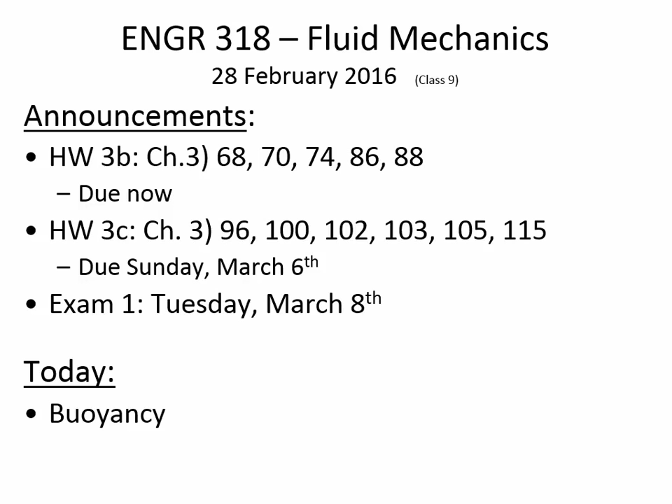Today we're talking about buoyancy, and I wanted to show you a picture of a gas station in West Virginia. This is where I'm from, back in the United States.

So what happened in this photo is that in West Virginia, the groundwater is very close to the surface. It's a very wet, rainy region, so there's a lot of water underground filling the pores in the soil. And when there's a lot of water in the soil, if the weight of a fuel tank like this is too low, it can push the fuel tank up and push the soil out of the way that's covering it, and it even has enough upward force to break the asphalt and concrete above it.

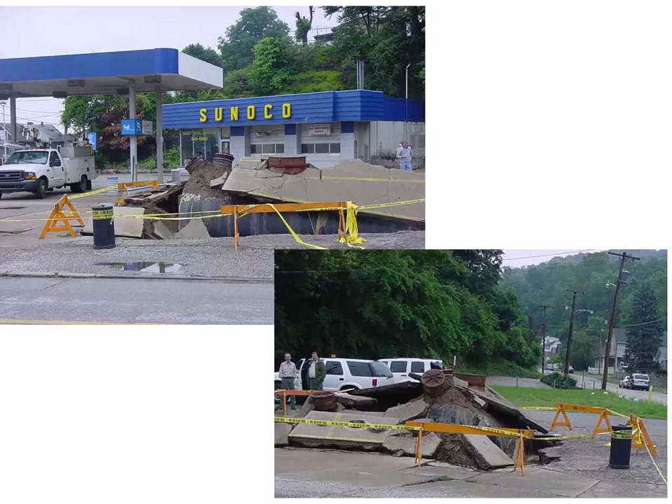Here's a few more pictures of it, and that's exactly what happened: the fuel tank was empty, and it was a very wet day where the water table came upwards and simply broke through the pavement.

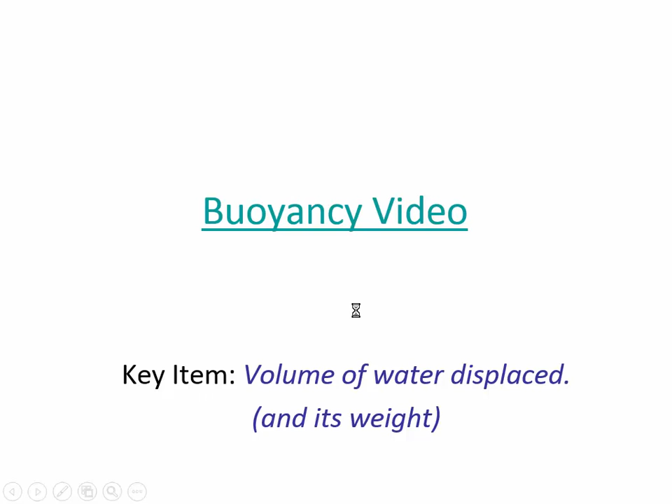This is an illustration of buoyancy that occurred even when we're talking about things other than pure liquids. Buoyancy is an important effect you have to consider in geotechnical engineering and in structural engineering. So that's what we're talking about today, buoyancy. The key item with buoyancy is the amount of water displaced by an object and the weight of the object itself. So let's watch a video that illustrates buoyancy and how it's used to control submarines.

The weight is equal to the buoyancy. Okay, the weight is equal to the buoyancy. Right, exactly, it's reached equilibrium at this point. That's why it's floating right now, because it came into equilibrium.

And so that's what we're going to be doing with buoyancy, considering force balances - looking at how the forces acting on the object compare to the weight of the object. Just to give you an idea of that simplification where we say the buoyant force is equal to the volume of water displaced, that's a simplification, but let's look from the beginning at the basics of what's happening to an object that's submerged underwater.

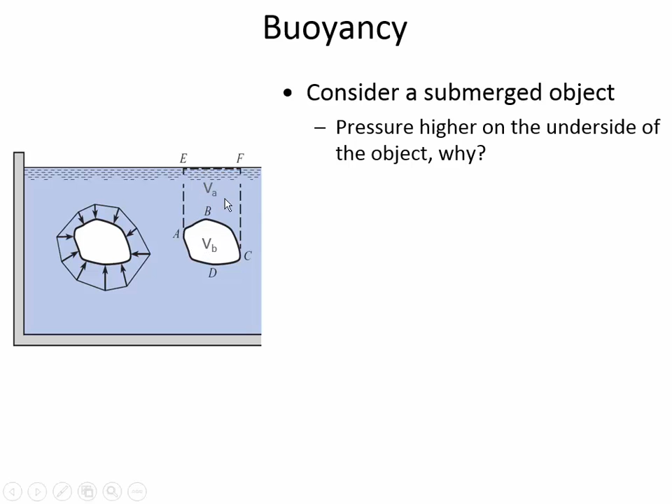All right, so what we have to do is consider the difference in the pressure between the top and the bottom. And so that's why the pressure is higher on the bottom, is because on the bottom the delta H is bigger. And if we consider the volumes involved, we can find the volume of water above the object and label that V sub A. V sub A is going to give us the weight of the water that's pushing downward. So here I've said force down is going to be the unit weight multiplied by the volume of water above the object. And the forces that are pushing up on the object are going to be equal to the volume of the body and the volume of liquid above the body. And so that's the net pressure that's acting upwards on that.

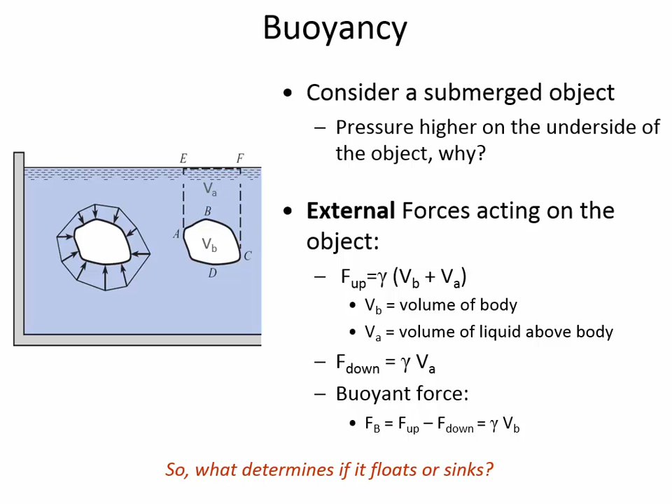And so if we consider the difference in the forces, the difference between the upward and downward forces, then F sub B, what we're calling the buoyant force, is just equal to the volume of the object itself multiplied by the unit weight. So what determines if it floats or sinks is when we compare the weight of the object to the buoyant forces of the object.

And so let's take a look at that with this cube. This is a plastic cube, and it has a volume of 1 by 1 by 1, so it's easy for us to calculate the volume on this one. We say that it has negligible weight - whatever plastic it's made out of is very, very light, and so the weight of this object is so low that we can neglect it. Let's say it's a hypothetical thing.

And it's submerged 3 meters below the surface, so the top surface is 3 meters below the water, and the bottom surface is 4 meters below the surface of the water. And so just as a check, so that we can compare the buoyant force approach to the difference in pressures and the difference of forces, go through these steps of: first, calculating the force on the bottom, the force on the top, the difference between the two in part C, and then in part D, just calculate the buoyant force based on the volume of this object.

And so when I say displaced, volume displaced, the interpretation of that is that this plastic cube that's in the water, it pushes the liquid that's surrounding it out of the way, and so it's displacing some water. That's what I mean by the volume displaced, is whatever this is taking up the space that normally would be occupied by the liquid. So let me bring up the lights, go through steps A through D, and see if we get the same force with either approach.

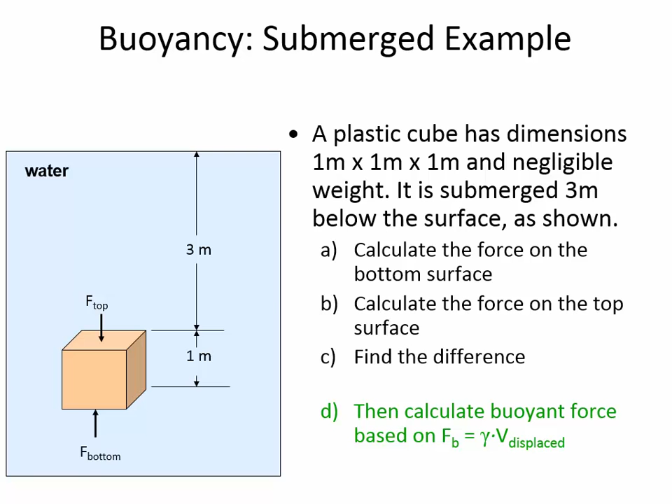All right, let's take a quick look at the solution here. So in step A, we're trying to find the force that's acting on the bottom, so it's pushing straight up from underneath the water. We can find the pressure at that depth by multiplying the depth of 4 meters by the unit weight, and then the area that the pressure is acting over - it's distributed over an area of 1 square meter. So that's how we can get the 39240 newtons, and it's pushing up.

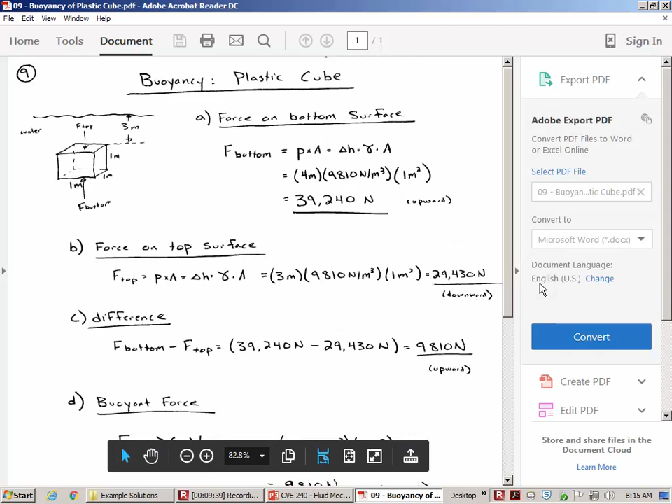And then the force from above that's pushing down is going to be equal to the depth of 3 meters by the unit weight of 9810, and then that's multiplied by 1 square meter. So the downward force is 29430 newtons, and so that's pushing down. So the net difference, if you've got one force pushing up and one force pushing down, and the force pushing up is larger, then we should have a positive difference. And the difference here is...

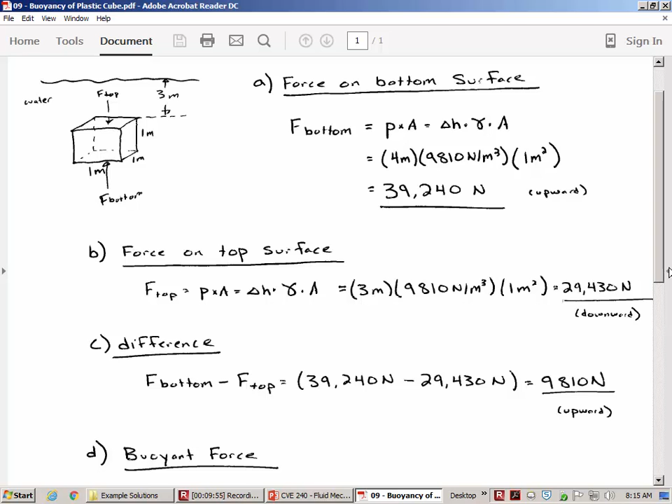9810 newtons upward. That means there's going to be a tendency for this to float up. Since we know the weight is negligible, it's not in equilibrium - this is going to be rising to the surface. Now if we look at the other method, just considering the buoyant force, we should get the same value for the upward force. If we just look at the volume of water that's displaced by this object, it's 1 cubic meter times the unit weight, so 9810 newtons upward.

Because the object is what's displacing water, we multiply it by the unit weight of the fluid being displaced, which is water, and the volume that's being displaced by the object. So we talk about the volume of the object itself.

It's going to go up. This one is going to go up. Yeah, it's not in equilibrium.

Now let's mention a couple of things. Right now we said it's going to be moving up, and the top is at a depth of 3 meters. What about when it moves up through the water a little bit? Let's see when it's at a depth of only 2 meters instead of 3. Are the buoyant forces going to change?

The difference will stay the same. Think about it: the pressures are going to be different. The pressure acting on the bottom will be lower, but the pressure acting on the top will also be lower. So as it rises through the fluid, although the pressures are changing, the net difference between them is the same. So the buoyant forces are not dependent on the depth.

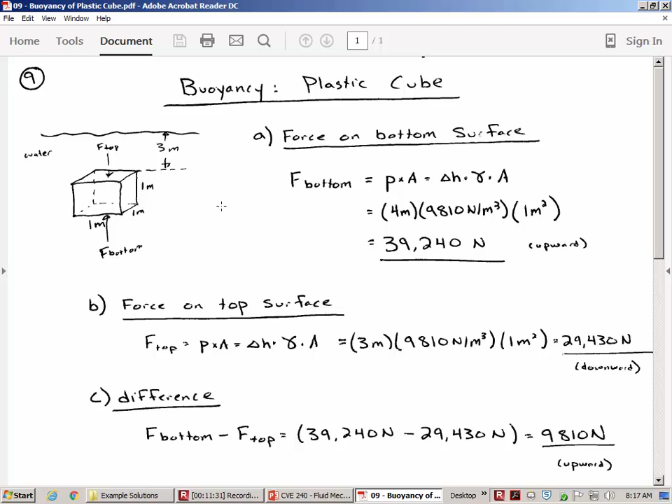We usually think that when you're really deep in the water, there's a ton of pressure pushing so hard on the object, and that's true. But the buoyant force—if we go to our simplified formula—nowhere in the buoyant force formula does it say what is the depth. It simply depends on the unit weight and the volume of water displaced.

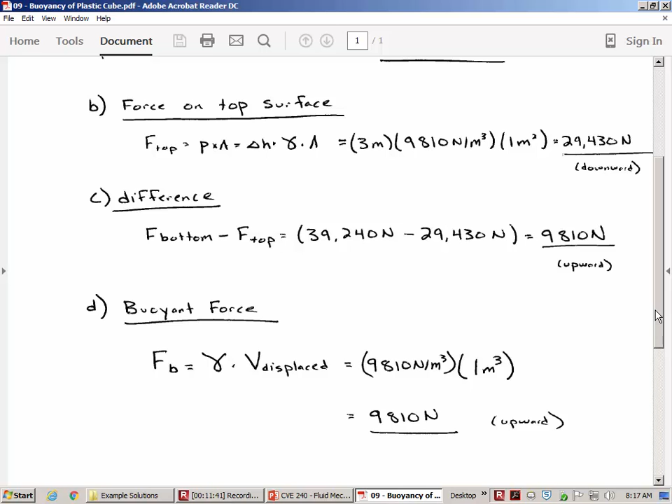Okay, are there any other questions before we move away from this example?

Now consider this object. It's only partly submerged. So sometimes the volume of the object and the volume of water that object displaces is not the same thing. Here you can see that the overall volume of the object would include A, B, C, D, just marking some of the key points of that object. But V sub D is the submerged volume—D stands for displaced, the amount of water that's displaced there. So the buoyant force acting upward is going to be the unit weight times V sub D.

Now, just by looking at it, we can tell that whatever this is does not have negligible weight. In that previous example, we said the plastic cube has negligible weight, and so it was not in equilibrium, it was floating up. Assuming that this is in equilibrium, that means there's enough weight acting downward so that this much of the object is submerged.

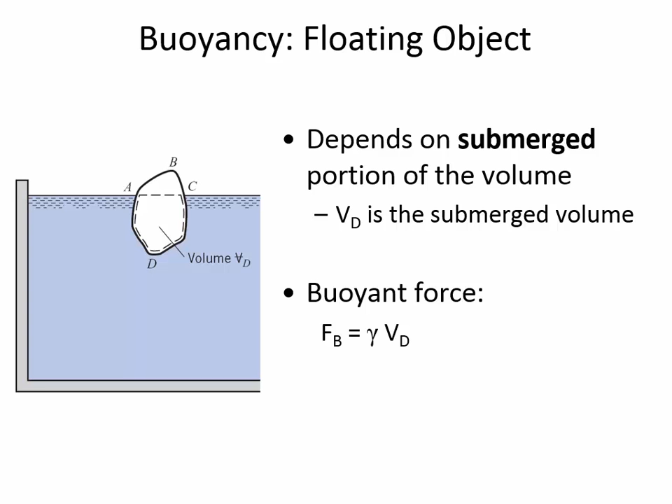We're going to take a look at that partially submerged case with this block. We have a block that's underwater, again made of plastic. We don't know what kind of plastic, we don't know really anything about it yet, except that right now it is in equilibrium, floating. Although it's 5 meters tall, it's submerged at a depth of 4.6 meters.

So we're going to go through these numbered steps, 1 through 5. I'd like you to go through them, and then later on I'll show you the solution. But the point of this illustration is to show you that we can learn a little bit about what kind of plastic this is by how it floats.

At the end, you're going to calculate the specific gravity of the block. By specific gravity, I mean SG, which is the unit weight of the block divided by the unit weight of water—that kind of specific gravity. Usually specific gravity is a property we apply to fluids, but you can apply that property to solids as well. And what I mean in part 4, the specific weight of the block, is you can calculate the gamma of the block as the weight of the block divided by the volume of the block.

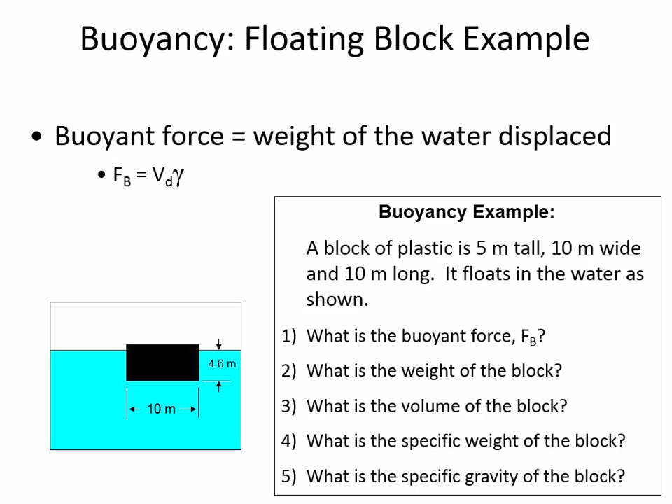All right, so in part one, we find that we need to find the buoyant force. And the key to calculating the buoyant force is just to find the weight of the water that's been pushed out of the way by this block. So its submerged volume is 4.6 by 10 by 10. And if you multiply that by the unit weight of the liquid, then it's...

4,510,000 newtons. Now, one thing I'll remind you is it's so important to always write the units next to every number. It's an investment in seeing your mistakes. Because if you always write these units next to your numbers, you're going to catch yourself if, for example, you use 9.81 instead of 9810. If you write, 9.81 would be kilonewtons, then you're going to remind yourself so that you could write the final answer in the correct units.

And so it needs to be the right numbers and the right units for full credit on a quiz or an exam. All right, now let me go back to the problem statement and ask you a question. I told you that this was in equilibrium, but what clue do we have from the problem statement that this is in equilibrium? Here in the description, there's the way it's written, it tells you that it's in equilibrium. Any guess? It floats. It floats in the water as shown.

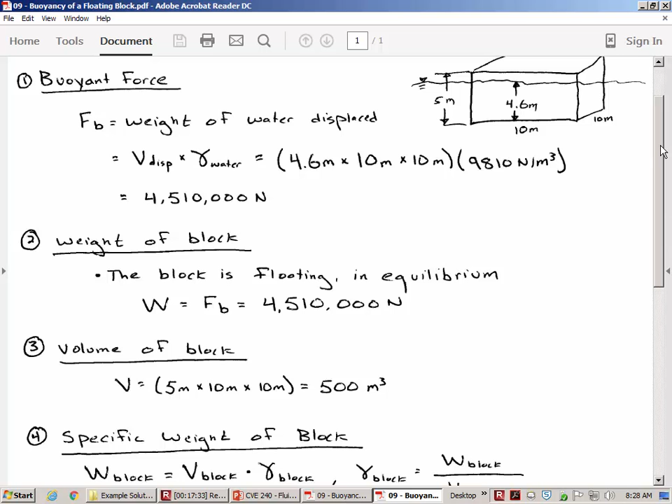Volume of the block -- it's talking about the physical volume of the block, not just the submerged volume. And the reason why is that we're going to use this volume when we calculate the specific weight of the block. And so that's step 4, finding the specific weight of the block with the formula that you can find the unit weight of something, whether it's a liquid or a solid. So in this case, the unit weight is for a solid object, and it's just the definition of that -- the weight of the object divided by the volume of the object.

And we know that the reason why it's floating is that its unit weight is less than the unit weight of water. If this was a dense object where the density is greater than 1,000 kilograms per cubic meter, or if the unit weight is greater than 9810, it would sink. But here, the unit weight is less than that, and that's why it's floating, because its unit weight is less than the unit weight of water.

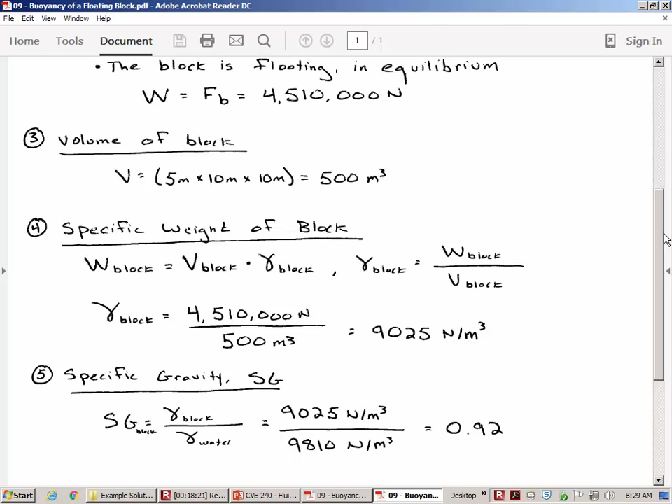And so we can calculate the specific gravity, 0.92, and it's not a coincidence that the block is 92% submerged. 0.92, or expressed as a percentage, the specific gravity is 92% that of water. If you look at the dimensions, the depth was 4.6 meters of its 5-meter height submerged. And so that gives us an idea that you can determine the specific gravity of some object by looking at how it floats in the water. The percent submergence and specific gravity are the same thing.

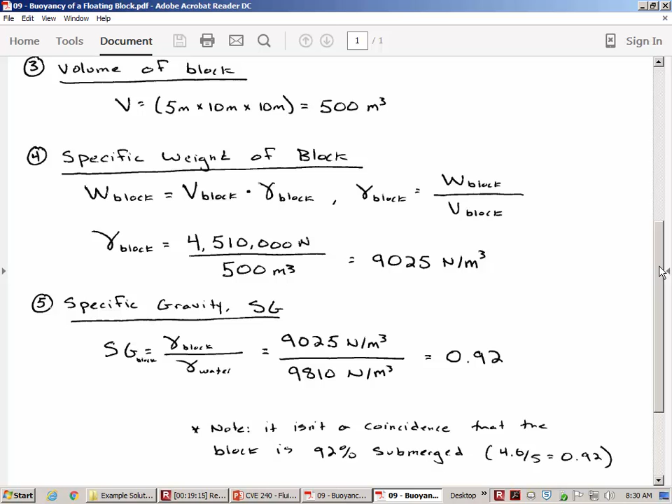All right, so are there questions from this example, either the concepts or the calculations? Professor, usually when we solve a question about pressure, we apply pressure equals delta H times area. Okay, so you're saying, could we have found the buoyant force by looking at the depth and the area? No, I mean, don't we have pressure acting other than the buoyancy?

Well, there's pressure acting on the side. Is that what you mean? And on the bottom, there's no -- On the bottom? This is the pressure that's acting on the bottom. It's only the buoyancy. Yep. So the buoyant force, another way we could find that buoyant force is, what's the bottom surface area? It's 10 by 10, right?

So 10 by 10, that's 100 meters squared as the bottom surface area. The pressure at that depth is delta H times gamma. The delta H is 4.6 meters, and gamma is 9810 newtons per meter cubed. So you could find that pressure and multiply it by the area, and you'd get this same force.

And then the pressures on the side—since it's a box, there's pressure acting on the front, the back, and both sides, and all of those forces cancel each other out, so it's not moving around because of any of the side forces.

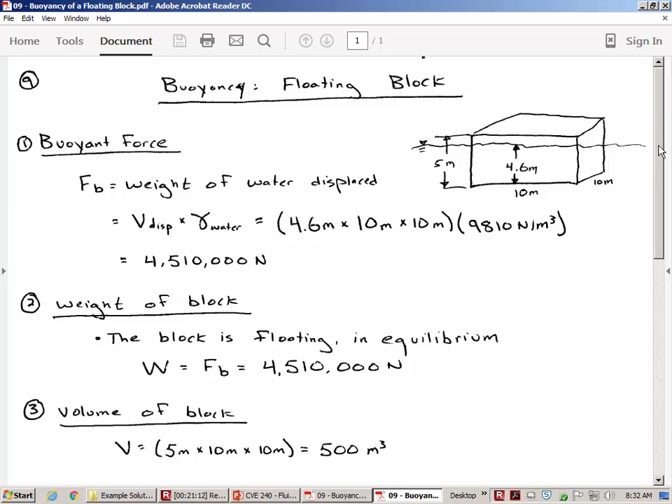So we're not given the width, just the 10 and 10. Can we start from the bottom of this process and solve it backwards? We divide 4.6 by 5 to find the percentage submerged. That would tell you the unit weight and the specific gravity, but I don't know that we'd eventually be able to know the dimensions from that. There's lots of information you can get without knowing the dimensions—it depends on what the problem is asking. We're going to do one in just a minute where you're not given the dimensions, and maybe that'll address the point you're bringing up.

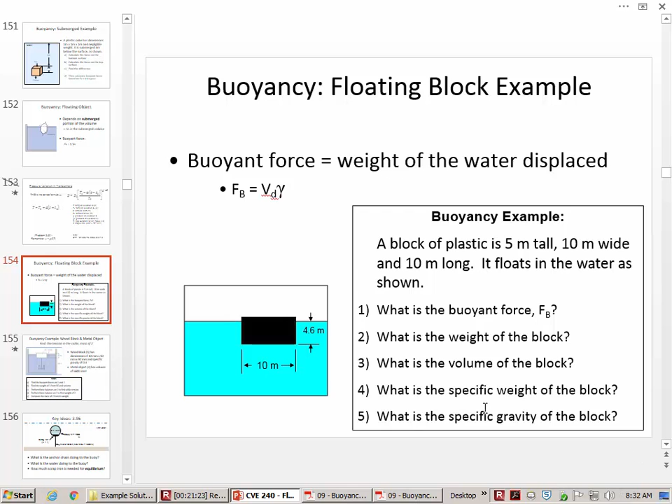All right, so this is the one I'm talking about.

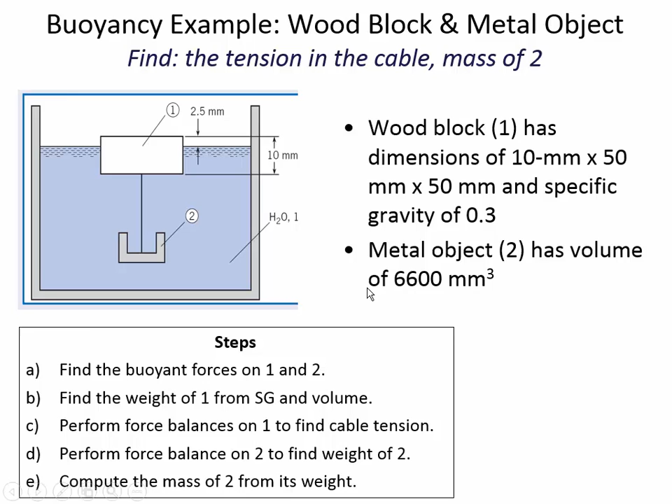All right, let's take a look at the solution. We've got a floating block connected to a metal piece in the water, and we know its dimensions in millimeters. Here's the beginning: I did my little drawing and took a look at the dimensions. The volume of object 2 is 6,600 cubic millimeters, which in cubic meters is 6.6 times 10 to the minus 6th cubic meters.

I want to find the buoyant force, the force the water is pushing on objects 1 and 2. What we know is buoyant force equals the unit weight of water times the volume of water displaced. So I calculate the displaced volume: 7.5 millimeters, converted into meters, multiplied by 50 millimeters by 50 millimeters—that's the submerged volume. Multiplying by the unit weight of water gives 0.184 newtons as the force pushing up on object 1.

Object 2 is a little easier because we don't have to calculate the volume—it's given directly. The volume of object 2 is 6.6 times 10 to the minus 6.

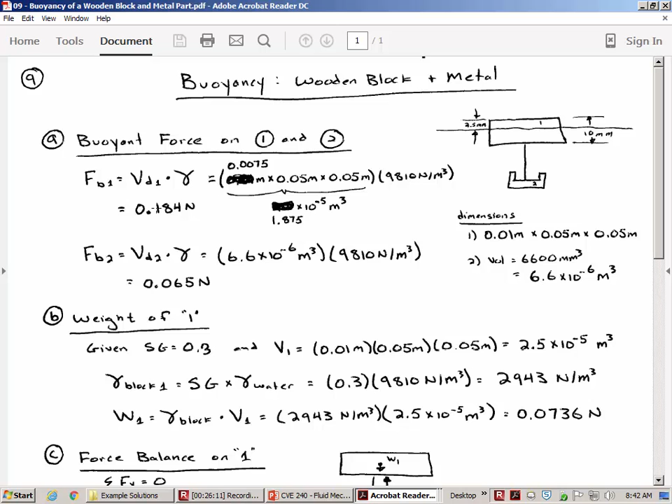So let's do a force balance on that wooden block, object 1. What are the forces? There's the weight acting down, there's the buoyant force pushing up, and then there's some force in the cable pulling it down as well. So those are the three forces acting on object 1.

And we know that it's in equilibrium, so the sum of the forces in the vertical direction equals 0. Another way of saying that is the forces up equal the forces down. So the force up is the buoyant force - that's the only thing pushing the block upward. Then there's two forces down, the weight of the object and the tension in the cable. We know both the buoyant force and the weight, but we don't know the tension in the cable yet. That's what we're solving for in the force balance.

So we can find the tension in the cable. It's 0.1104 newtons, pulling it down. Okay, so are there questions so far on this one?

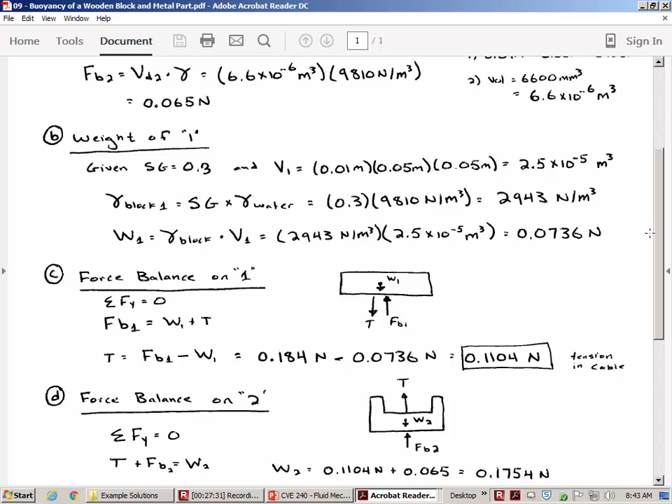So now if we do a drawing of the next object and do a force balance on this metal part that's fully submerged, what are the forces? There's the weight going down, the buoyant force going up, and the tension in the cable is pulling this one up. So the tension was down for the other object, but it's pulling upward on this one that's fully submerged.

So that's how we find the weight, because we already knew the tension, and we previously calculated the buoyant force in the earlier step. So now we know the weight of object 2. Any questions with that one?

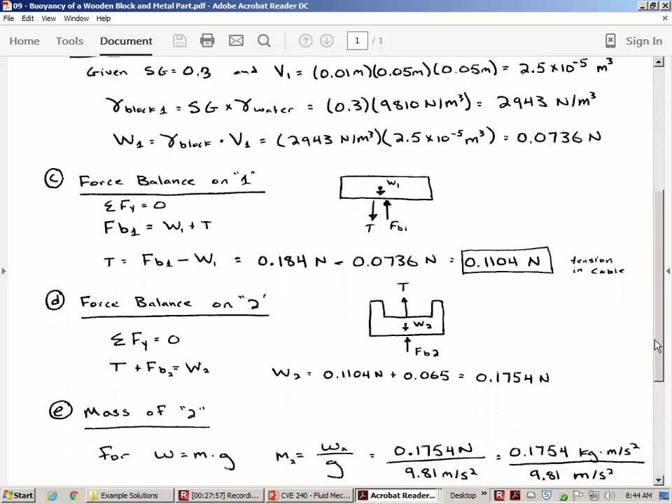All right, so then we can find the mass of it, because we know the weight - I guess we don't need the volume for this, we just have the weight, and g gives us the mass. So the mass of it is 0.0179 kilograms.

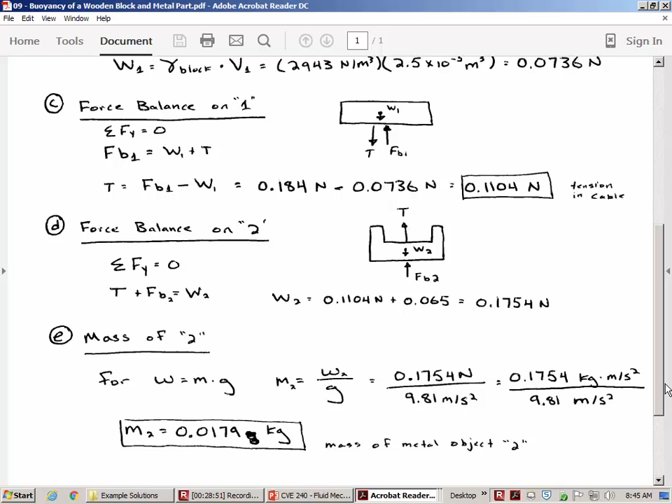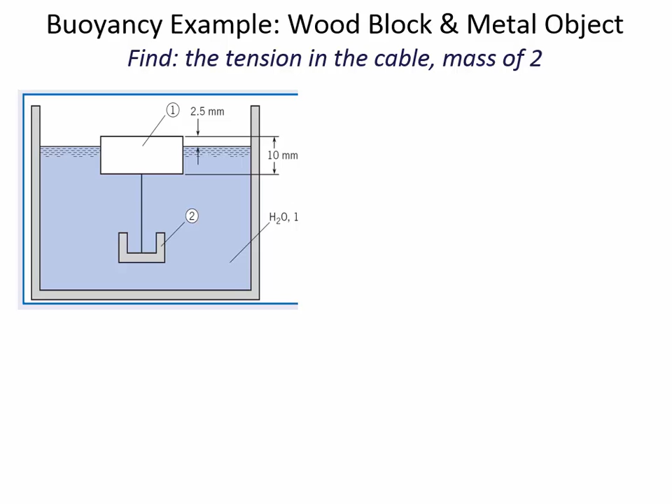Speaking of the homework, let's take a look at some of the key ideas from the problems. Here you have one very similar to what we've just been talking about. There's a problem where there's a buoy submerged underwater, and you're given the diameter of the buoy, and the weight of the metal the buoy is made out of. They're telling you there's a chain connecting the bottom of the ocean to that buoy, and the maximum force that can be in that chain - so they're defining the maximum tension in the cable. What they're trying to find out is how much scrap iron you should put inside the buoy based on all of the parameters you're given.

So what I'd like you to think about is, what is the anchor chain doing to the buoy? If that anchor chain wasn't there, it would float to the surface. So obviously the anchor chain is pulling down on the buoy, and the water is pushing up.

You can do a force balance on the buoy similar to the drawings in my solution, where you take the object and draw the tension down, the weight down, and the buoyant forces up. Ultimately, the only unknown is the total weight.

In this one, there are two different weights. If we draw the buoy: tension is down, buoyant force is up. Now there's weight 1 and weight 2. Weight 1 is already given—it's the weight of the buoy. But they're saying how much scrap should you put in there so that the tension in the cable isn't exceeded.

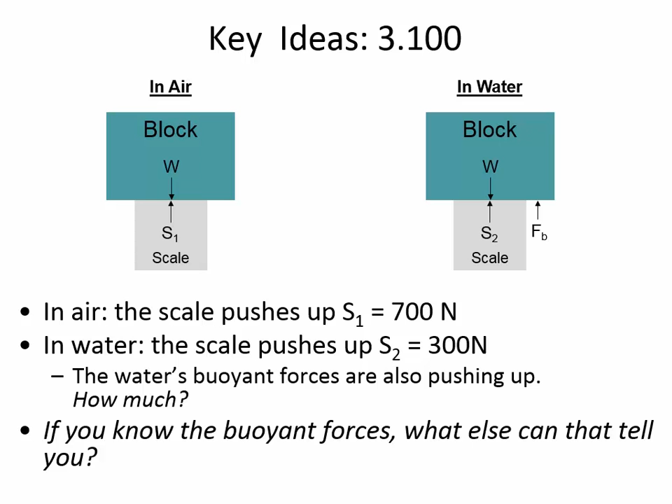You can come back to the video if you need to when you're working on problem 100, but do a little sketch like this, and remember that what the scale tells you isn't the object's weight, but how much force it's pushing up.